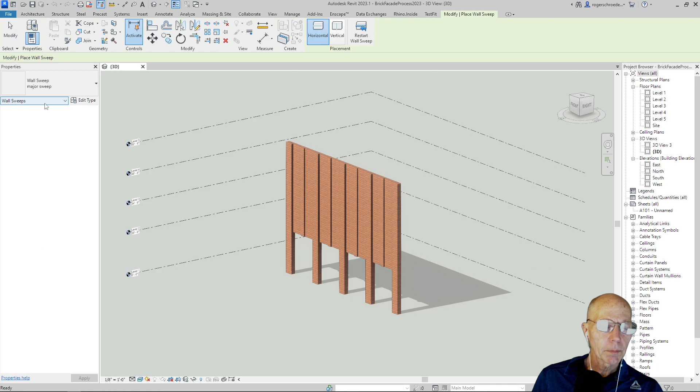I've already created two sweep profiles. So I'm going to go to wall sweep, and I have a major sweep, and I'll just show you what that is. I'll go to edit type. I made a profile shape just like we had done with the curb on our sidewalk. I've given it a color, so it's all set then to be applied in a custom way. And I made a minor sweep also.

So I've selected that. I'm going to come up to the only wall surface, and it's highlighting it just as if we would have put a curb on a floor or a slab edge. I'm just going to click that randomly, right click and cancel out of that, and that will make it appear. I want it to be at level 2, but sitting right on top of level 2, so I'm just going to make sure that this offset is 0.

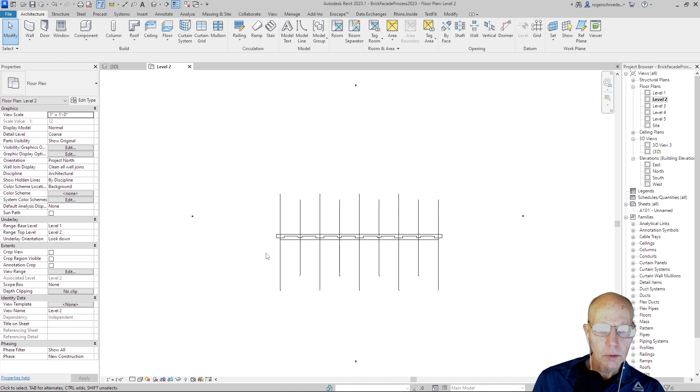And now you'll notice that the cornice isn't coming all the way to the edge of the building. That's because it's lined up with the wall tool. So if we were to go to level 2, it's probably a little more descriptive of what's going on here. Here is our sweep. And if I click on the wall, you can see the wall is identical in length. We've added this column on, so we really need a little extra.

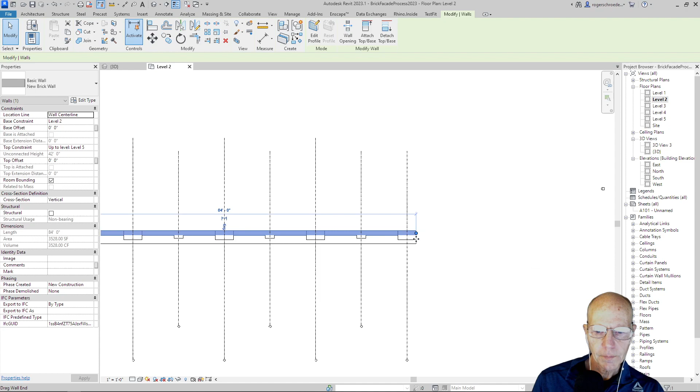So I'm going to grab the wall and just stretch it out. And you'll notice the sweep follows with it. I'm going to go ahead and do the same thing on the other side. And then we'll go back to the 3D view, and you can see how that is.

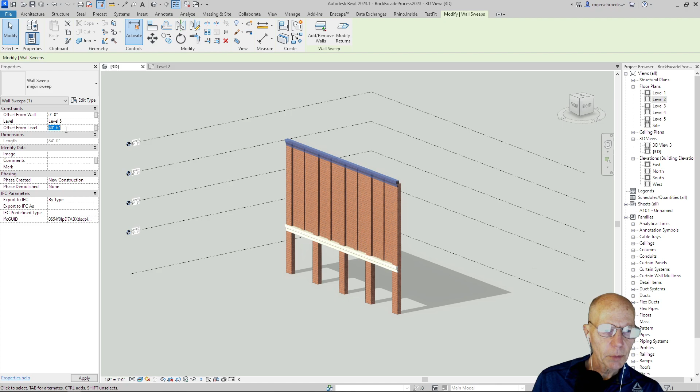All right, so now we need another one at the top. So I'm going to go to Architectural, Sweep, click it up there, go back to Modify, it'll appear. This time it's the right length because we've already corrected the wall length. We really want it to be at level 5 with 0 offset, so it's just sitting right up there at the top as part of the parapet. I'm just going to type in 0 offset.

So now we have our major sweep, and I'd like to place the minor sweep. The idea with the minor sweep is it's going to delineate the floor levels just like a spandrel would, but a little tighter because we have double hung windows that we're going to place in here. They're going to line up right with the floor levels. So we're going to go to wall, wall sweep, and grab the minor sweep this time.

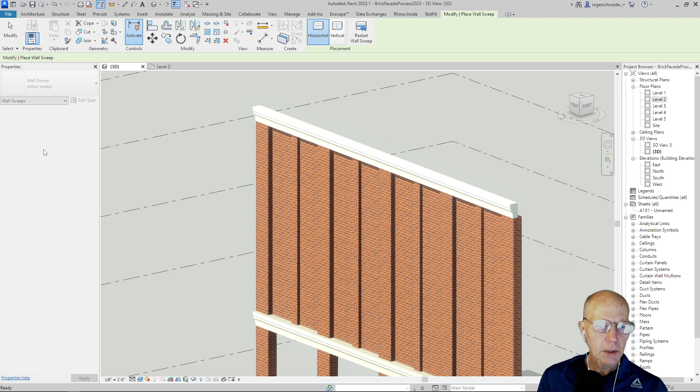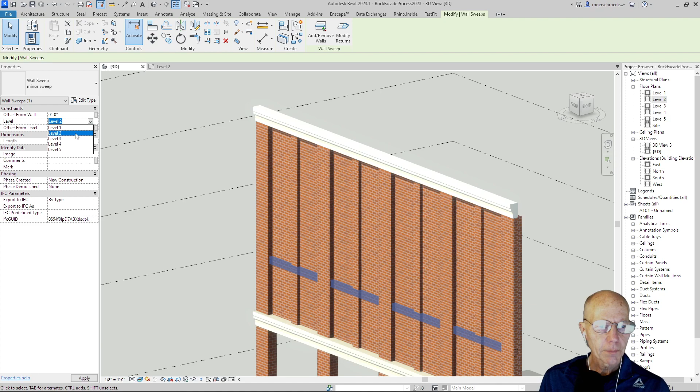And once again, I'll just click one in place, go back to modify, and you'll notice how it's going underneath the large column and over the small column. So it creates a sense of layering to that kind of brickwork. I'm going to select it. I want it to be attached to level 3, at the floor level of level 3 with 0 offset. So that one is set.

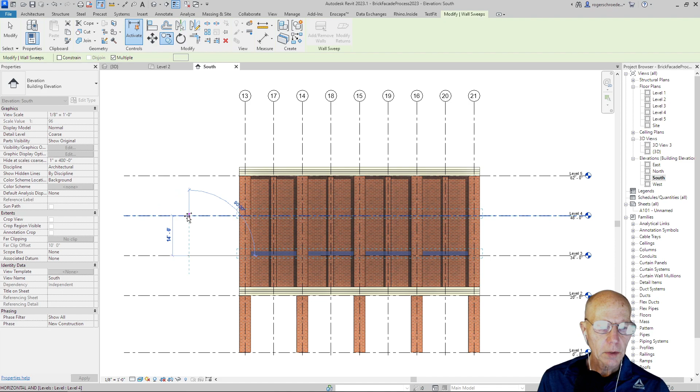Let's just go to the south elevation here. Right away you can see the nice things that are happening in the way that it's portrayed. You see those nice shadows, it's showing you that kind of depth to the facade. So we're just going to copy this one up. We'll grab the copy tool and go from level line to level line. Then we'll just take one last look at it. So we're all set, I think, to add the windows.